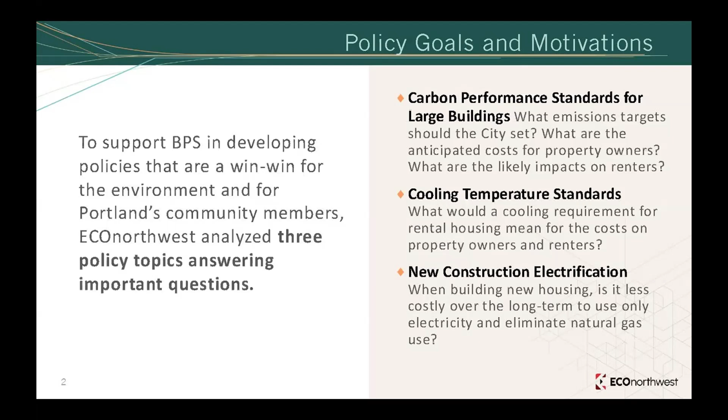And so there's a reason you pay attention to buildings. The city is starting by paying attention to those buildings that are over 20,000 square feet. Buildings make up about 40% of all emissions in the city of Portland. And for those large buildings, there are about a little less than 1,400 large buildings, including large multifamily, large office, large commercial, schools, hotels, hospitals, things of that nature. So it's really kind of the low hanging fruit.

They represent about just under half of all emissions from buildings themselves, but you have to deal with fewer property owners. So you can really have a pretty big impact by targeting some of those properties first. Then you can start thinking about all the single family homes.

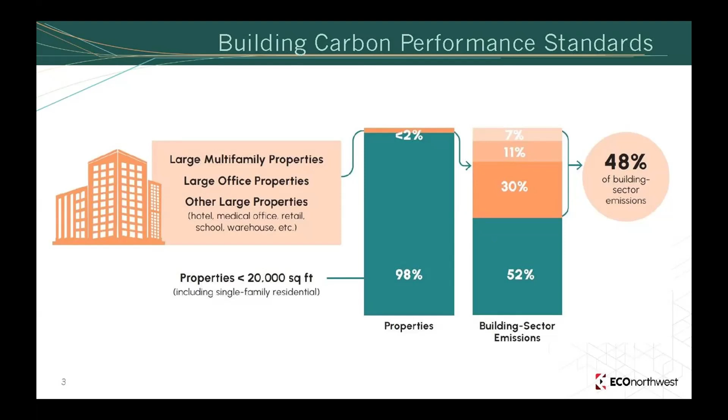And of course, you're not really working in a vacuum. The Oregon legislature passed House Bill 2021, the Oregon Clean Energy Targets. This bill requires Portland General Electric and Pacific Power to reduce their emission levels to about 80% below a baseline by 2030 and 100% by 2040. So there's a lot of decarbonization that's happening within the energy sector.

And so we also wanted to understand just how much more would you have to get from the buildings themselves. For the city of Portland, we looked at not just multifamily, but we were also looking at office buildings. Through this analysis, we determined that you would need to reduce emissions by about 1 kilogram of CO2 equivalent per square foot. There was a measurable that we had to get to really understand what are the potential costs on the other side.

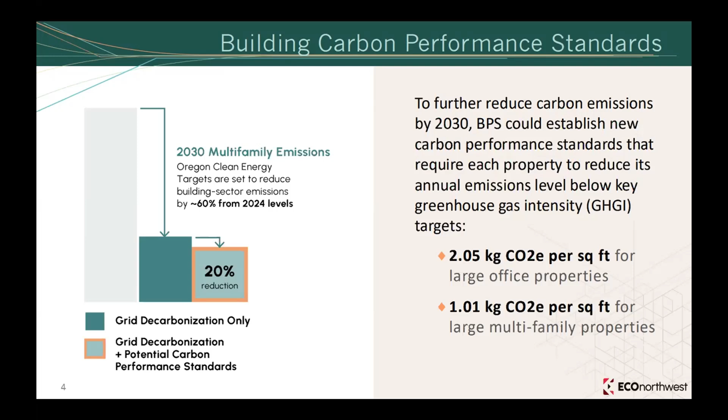And so we looked at, and I wanted to say too that we worked with ZGF architects and PAE electrical and mechanical engineers and DCW cost estimators, really to make sure that we understood what do you have to do with existing, primarily multifamily, I'm going to talk about today, to get the kind of reductions in carbon emissions and to be able to estimate some of those costs.

And as you can probably guess, there is a really wide range of building types and conditions throughout the city of Portland. So we were looking at things like lighting and plug loads, the building envelope improvements, insulation, sealing, things like that, as well as water heating, air heating, cooking, what are all the different things that you could potentially upgrade within a building.

And then actually we wanted to make it as specific to the city of Portland as possible. So we looked at the building stock and when buildings were actually built. And we were able to, looking at all that, really start to categorize different types of buildings, some that would need more intensive investments and some that would need less intensive investments.

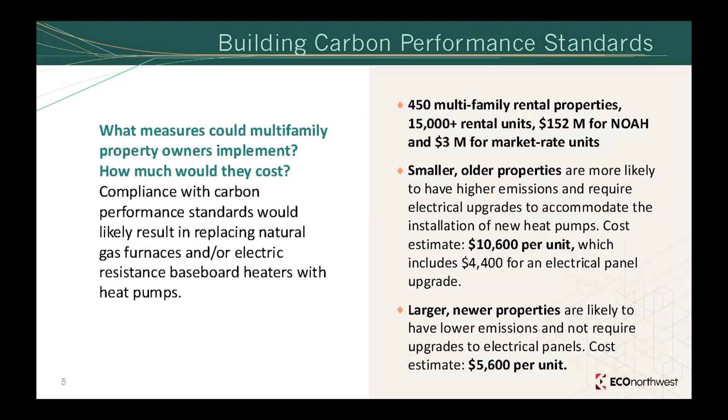Finally, I did want to touch on what this means for rents. Many property owners are going to want to pass on the cost of these investments.

We also looked back at the fall of 2024, and the outlook for incentives, both in the federal Inflation Reduction Act and the Portland Clean Energy Fund and other state incentives, were very positive. It looks a little bit dimmer, I would say, from my seat today.

But we were looking at both what the overall cost would be, what the potential incentives are, what the gap would be that might then need to be filled, and what that starts to look like. One of the things that was clear here is that the rental market is a competitive market.

Landlords are competing for different renters, and depending on how tight that market is, they have more or less leverage. There are a lot of individual players making decisions, and they're not exactly coordinated with each other. So they've got to determine how much they might potentially increase those rents.

If this is a requirement that's across the city, then that amenity might not be seen as an important value that renters are saying, I'm going to pay a little bit more so that I can make sure that I get that heat pump. There's just not as much evidence out there to back that up.

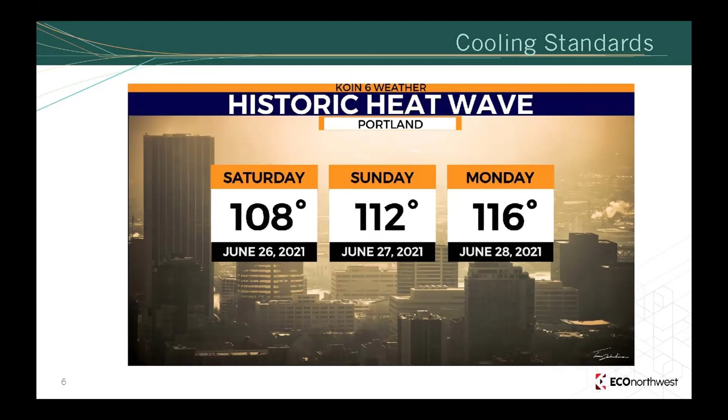That June, I actually celebrated my birthday during the heat wave on that 112-degree day, and it still feels very shocking to me to remember what that felt like.

The thing that, as I've watched other heat waves go across the country, is always a good reminder: when there are heat waves, people die. The people that more often die are older adults living at home, often income restricted, lower income. They die because people aren't checking in with them, or even if they have a way to cool their house, if they do have an air conditioner, it might only reduce the temperature by about 20 degrees. Or they might be really worried about how much it's going to cost to run that air conditioner as much as they should. With these higher heat waves, it also doesn't cool down as much at night.

And so that adds additional stress to people who are living through it. Of course, it's even hotter in so many of the low income areas across the country, up to 5 degrees. And those are not only low income, but often places where people of color are living. So it's always a good reminder to understand why it's important to think about the health implications of our housing policies and climate related policies.

Next slide. So many more cities and communities across the country are thinking about a cooling standard. Most right now have a minimum, like a heating standard, so you can't rent an ice box. Landlords have to provide a furnace or something so you can heat up your unit and be comfortable where you live. Now with some of these extreme heat waves we've seen, they're also asking, what about a ceiling? Can we make sure people can reduce the temperature in their home to something they can survive? You've seen some of these in Arizona, Maryland, and California has some other requirements as well.

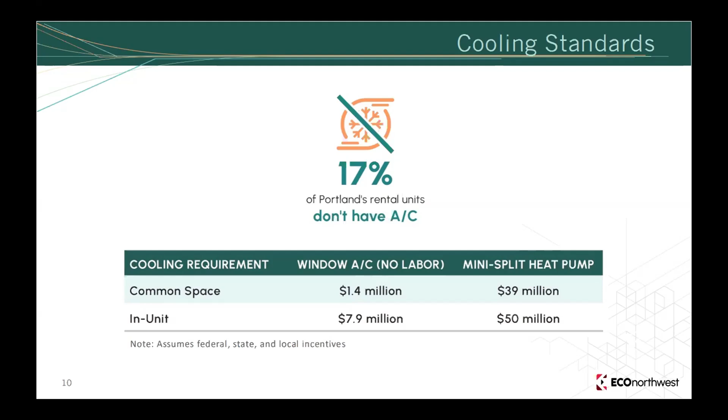The final bit of analysis we did, which was super interesting, is wanting to compare what it costs if you had an all gas, single family or multifamily home, versus a mix, since many of us have a combination like an electric stove but a gas heater. What about a conventional all electric, meaning lower cost electric appliances with baseboard heating, an electric heater or water heater, versus a high efficiency all electric?

We looked at both the installation or upfront construction costs for new construction, and the operating costs over roughly a 15-year period, just to get a better understanding of the total cost.

Looking at single family, we compared electric to gas costs, and gas was more expensive. Conventional electric was cheaper to build, but the high efficiency option basically broke even once you got to that 15-year mark, so you can see that return on investment.

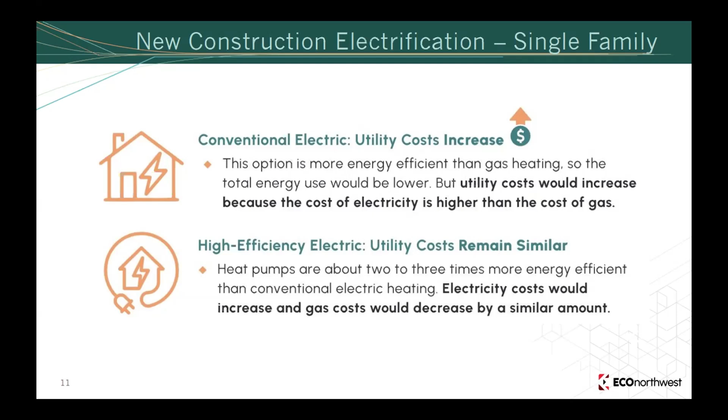I want to put a caveat that it's pretty rare to have an all gas multifamily apartment building or property, because it's so much more expensive, so you almost never see it. That's one reason we included mixed heat - property developers are often looking for the least cost while still having the amenities people care about, and you see a lot of air conditioned units especially in newer construction.

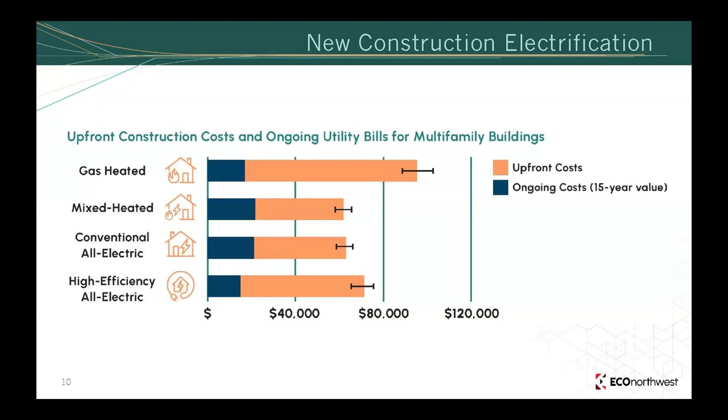You don't have to take my word for it - next slide. If you want to read any of these reports, you can download them from the City of Portland's website, where there's more information about building decarbonization efforts. Thank you.

Hi everybody, my name's Rita Haberman. I'm a built environment specialist with Oregon DEQ, and I'm going to share information about embodied carbon: what is it, why should we care about it, and what are we doing about it, what can we do about it?

Next slide please. Before I dive in, you might be wondering why DEQ is working in the built environment. DEQ regulates tailpipe emissions and polluters and promotes recycling - yeah, DEQ does that.

More than 10 years ago, DEQ embarked upon a strategic plan, and what differentiated that effort from prior ones was that DEQ really took a life cycle perspective on the materials we use, everything from building products to appliances and furniture. What we learned is that the lion's share of impacts of the materials and products we use are upstream in the manufacturing process, not at end of life disposal, where DEQ's program was called Solid Waste and Recycling.

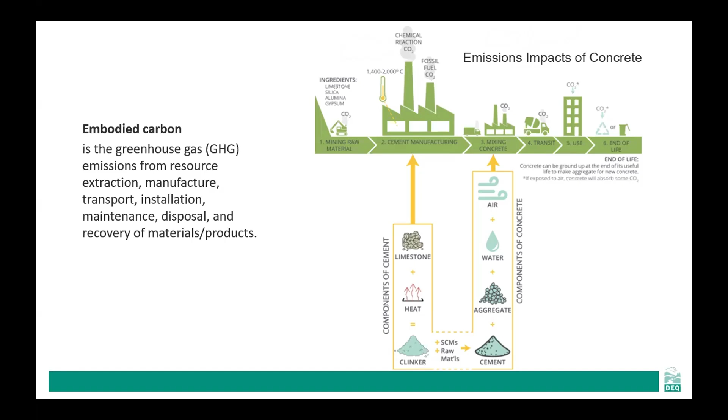It's not just concrete and cement that have the majority of their impacts upstream in production. In general, for all building products—with some exceptions—roughly 90% of their impacts are upstream in manufacturing and production.

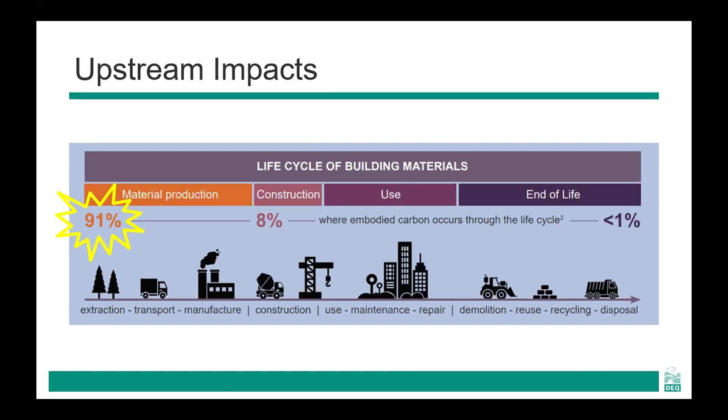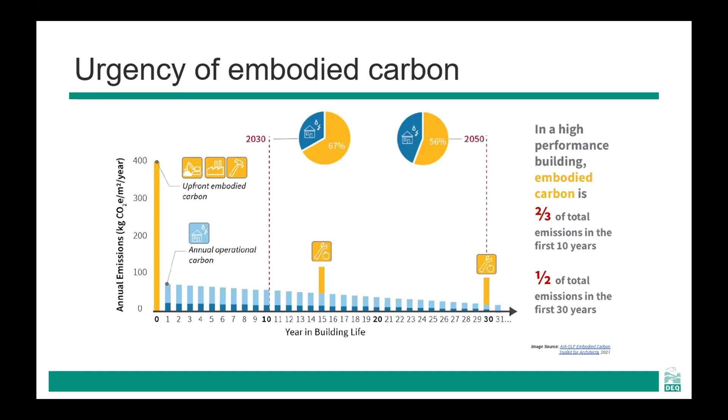As Becky was noting, our grid is getting greener, so our operational load will go down regardless of what we do to a specific building. My point is that as our buildings get more energy efficient, their operational carbon impact is decreasing. The remaining piece of the puzzle we still need to address is the embodied carbon impacts of our buildings associated with materials.

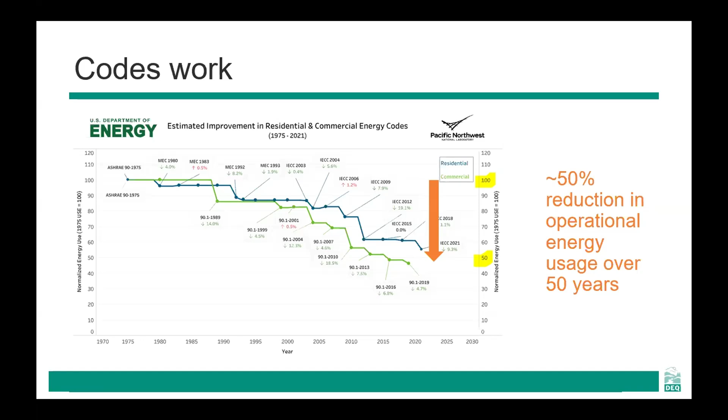So my point here is, when we focus on issues, we can do amazing work. If we don't focus on them, we're in trouble. One of the things we're working on at DEQ is supporting the Building Codes Division and other players to explore integrating embodied carbon limits within our building code, just like we have energy efficiency within our building code. Codes work.

So how do we measure, how do we quantify embodied carbon? This can get really complex, but in its simplest terms, it's done through a rigorous accounting methodology based on ISO standards—thinking about what goes into it and what goes out. The results, for building products and other products, get compiled into a report called an environmental product declaration, or EPD.

Think of an EPD, environmental product declaration—it's really analogous to a nutritional label. With an EPD, we can compare the embodied carbon or global warming potential of different sheetrock products, just like we can compare the caloric characteristics of different ice cream. So it's really a label to help inform our procurement.

The embodied carbon emissions of building materials used throughout the state of Oregon account for more than 14% of our consumption-based greenhouse gas impacts—that's a pretty big slice of the pie. If we add the operational carbon impacts of our buildings, which ironically is also around 14% now, our buildings account for more than a quarter of our greenhouse gas impacts throughout the state of Oregon. That's a big chunk of the pie, and an area to focus on.

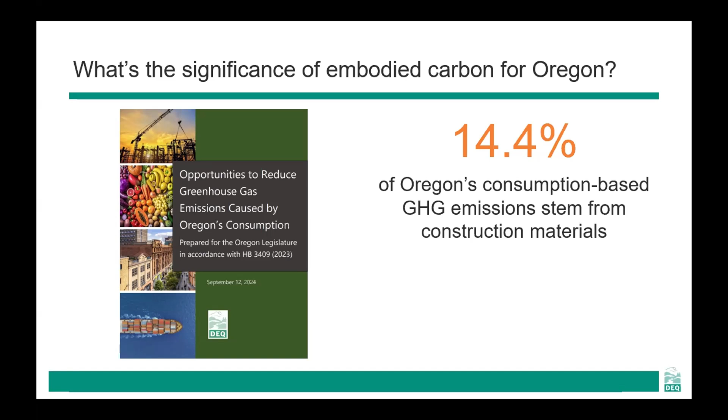So what do we do about it? Well, one thing we're doing is we need to assess, quantify, and disclose the impacts of our building products. We need to help and nudge manufacturers to do life cycle assessments of their products and disclose those carbon impacts.

Last summer, DEQ partnered with our sister agency in Washington State Department of Commerce, as well as International Code Council, and we pursued funding from US EPA specifically to help manufacturers of building products serving our region do that life cycle assessment and produce EPDs. That's kind of step one.

Unfortunately, this grant did not get through contract execution before January 20th this year, so this program is in limbo. We haven't formally heard yet whether it's stalled out indefinitely and dead. We're still holding out a little bit of hope because a lot of manufacturers were also awarded these grant funds to do this work. Anyway, it's an important tool and important strategy.

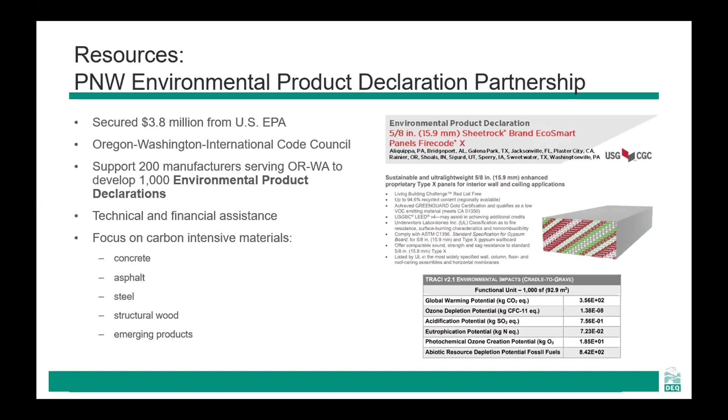Next slide. Another thing we're doing is we pursued many buckets of EPA funding while the getting was good. Last summer, the state of Oregon secured just shy of $200 million from EPA in a program called Climate Pollution Reduction Grants. This was a joint effort with the governor's office, Oregon Department of Energy, and other partners to implement 12 priority strategic climate actions, including some related to housing.

Approximately 25 million of the 200 million is specifically for housing. Next slide, please. More specifically, that 25 million is going to be used to incentivize two different low carbon housing strategies.

The first one is adaptive reuse of underutilized existing buildings, converting those to housing. The potential for this is significant. It's no surprise to a lot of us who run around Portland. Approximately 1/3 of Portland downtown office buildings, I know the number fluctuates, but let's just say 1/4 to 1/3 are vacant. But it's not just the big Portland metropolitan area. There's a lot of opportunity in small town Oregon as well.

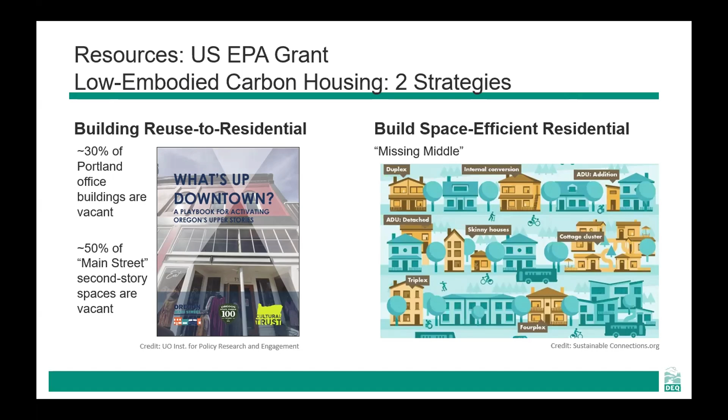We're focused on these two strategies, building reuse and space-efficient new housing, because they are by nature low carbon. Both of these strategies require less materials to build. Smaller spaces take less energy to heat, cool, ventilate, and light. Smaller spaces also provide less space for all our stuff.

Our stuff is a big part of our climate problem. We have an overconsumption problem. Do we all need two vehicles, a lawnmower, an extension ladder? We don't all need that stuff, and three couches for three rooms we don't even use. So that's part of the puzzle, but we'll save that one for another time.

And another thing—this is something this group knows very well—it's not just about building housing, it's really important about where we build it, right? Both of these strategies are conducive to development in already developed areas, infill, which gives us the opportunity to use existing infrastructure and get around that barrier.

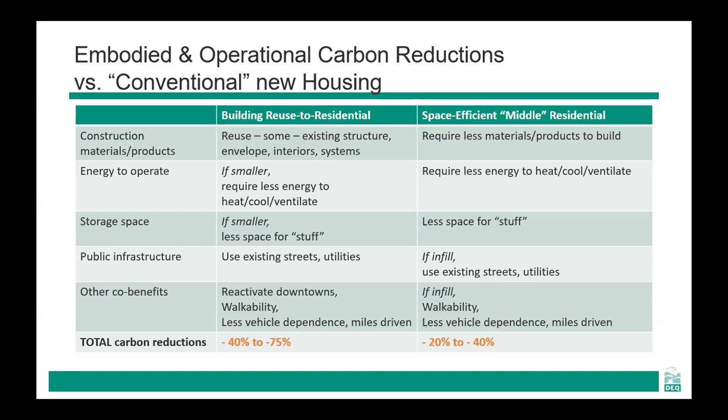Personally, I think one of the most interesting aspects of this are the co-benefits, which is kind of a sterile term for some of the most important, meaningful stuff. We have an opportunity to revitalize and reactivate some of our downtown areas, and an opportunity to provide more walkable lifestyles. Someone else mentioned this earlier, but we're so dependent on our vehicles—if we're really focused on that infill, we can reduce a lot of those impacts. They're noteworthy.

So the way we're going to get these $25 million out the door is we're partnering with 9 local governments throughout the state, including the city of Bend and Rachel and her team. Local governments are playing the role of boots on the ground, if you will. They're helping us with the outreach, getting the word out, and they're also going to be helping us with on-site verification.

To help us verify the projects. And DEQ is playing more of a higher level coordination role. We're putting together tools and resources, and we will be interfacing with US EPA. When it's all said and done, over the course of the 4-year implementation period, we're anticipating we'll have 900 new housing units that'll be workforce and affordable housing.

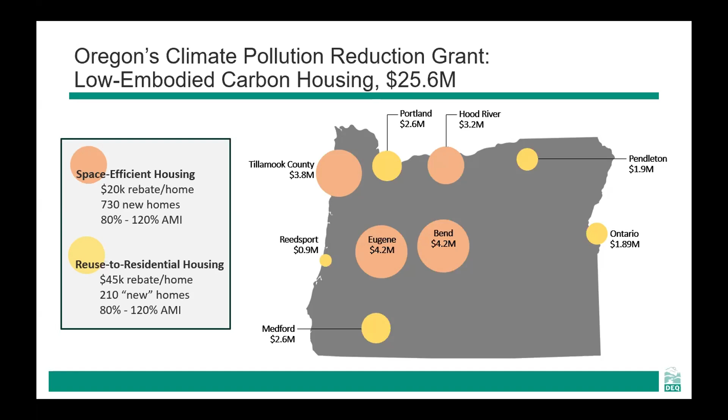And I should mention that these are EPA funds coming from the Inflation Reduction Act, and it's been a really, really interesting last several weeks with the spigot going on and off with regard to funding. At the moment, it's on, so we are forging ahead as quickly as we can, but it's been an extremely tumultuous last several weeks here.

Next slide. In addition to building reuse and building smaller, another opportunity related to reducing the impact of housing is the informed selection of the materials that we use to select more lower embodied carbon materials. Some really cool research has come out of Canada, Rocky Mountain Institute, and some partners. The takeaway here is there's a relatively limited list of product categories that account for the lion's share of the impact. So we don't need to be looking at nails and screws and door hardware and too many details. We can focus on a handful of product categories, like concrete, insulation, exterior cladding, sheetrock, and flooring.

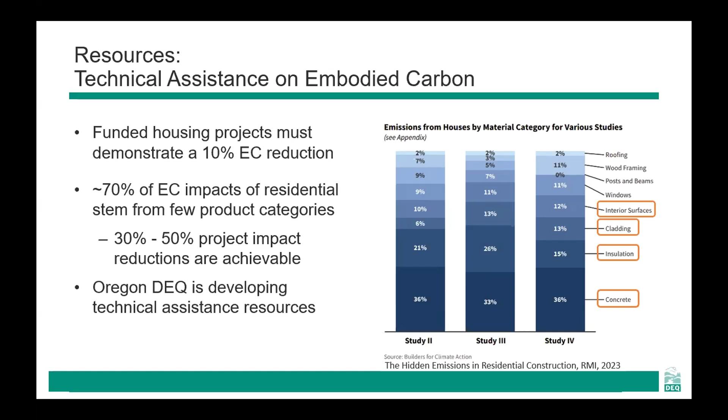If we just focused on those material categories and we used environmental product declarations associated with those products, we can reduce the impact significantly, 30%, 50%, just by making more informed choices.

So if embodied carbon is of any interest to you, I strongly encourage you to check out some resources. The Carbon Leadership Forum, CLF, top notch, just incredible research. They're serving all of us. They put together some incredible educational resources that we at DEQ use all the time. Architecture 2030 is another really helpful resource. And then DEQ is going to be putting together technical assistance resources to help housing projects that are part of the grant program that I mentioned.

But one of the efforts that I just want to call out is Oregon Building Codes Division last year. They did a study of the potential of including embodied carbon limits within building code, and they completed that study and analysis, which DEQ supported them in that effort. They issued that in December, right before the end of the year. We see that as very, very promising, and I call it out because it might be coming down the pike, and it might be something that you might be interested in checking out.

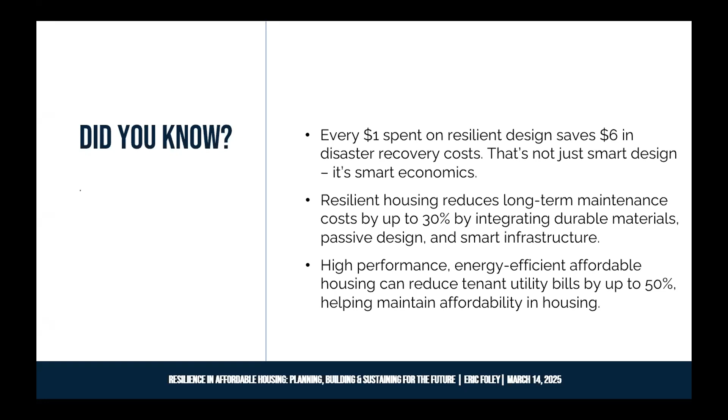Housing has, in terms of long-term maintenance, up to 30% reductions through durable materials, embodied carbon, passive designs, and smart infrastructure. These are all really important impacts. There's also reduction of utility bills - when you get into a house, it's not just the cost of rent, but also the utilities you spend to maintain and live in those spaces. Sometimes when utility costs go too high, you may be forced out of housing, so it's really important to keep those costs low.

So here's going to span out a little bit in terms of the financial implications. Two years ago, when I gave a presentation on resiliency, the number in 2022 from Munich RE, a global reinsurer and one of the largest outfits that does so, was $270 billion. In 2024, that number had grown to $320 billion of financial impacts on a worldwide basis.

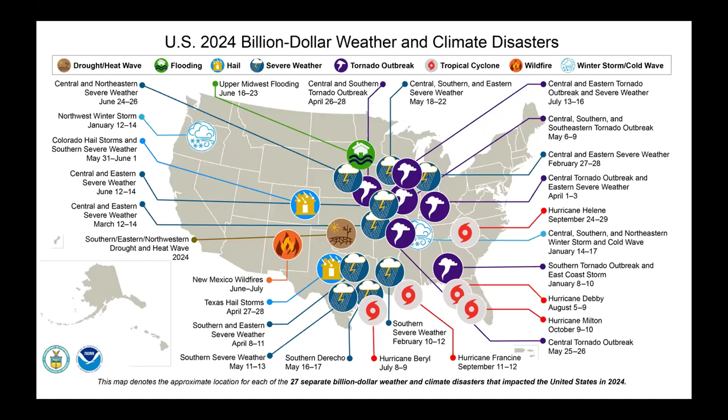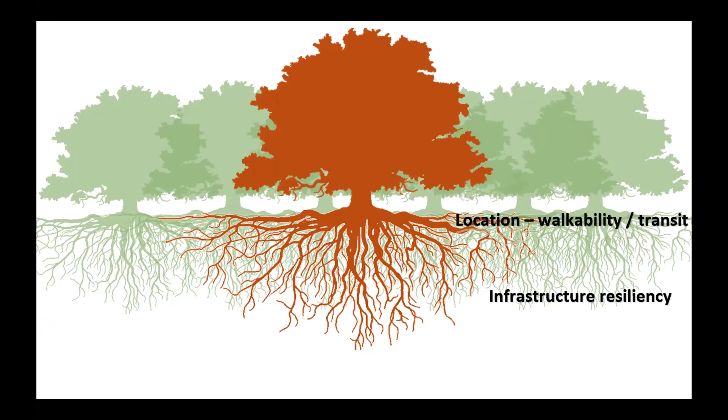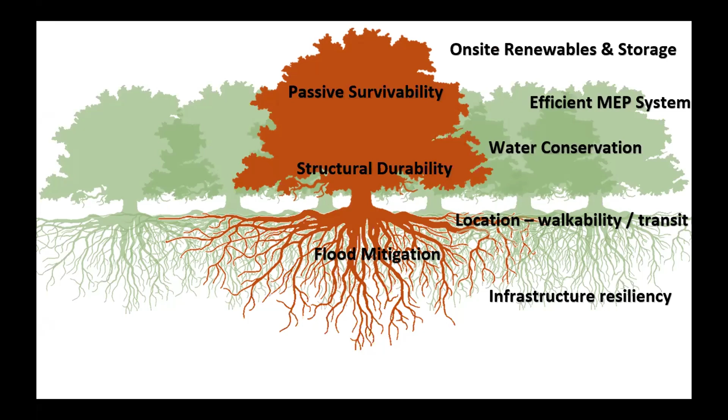So we have to think about it as an ecosystem — you are not just relying on yourselves, but you're relying on those neighbors around you, especially when disaster is happening. So location, transportation, infrastructure — we're looking at passive survivability, structural durability, flood mitigations. We're looking at on-site renewables and storage, and then we keep moving through here. There's a lot of clicks. Natural lights and also operations affordability.

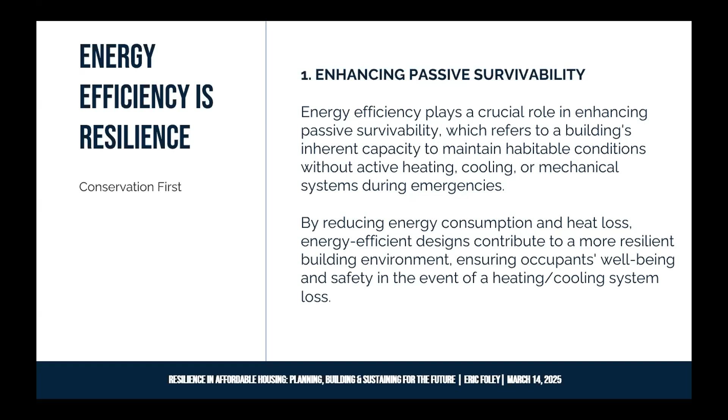When I talk about sustainability and resiliency factors, I talk about passive survivability first. We want to think about the infrastructure, the building itself, and how it's able to survive through means within itself, not through mechanical means or other utilities, because when a natural disaster happens, most of that infrastructure is probably going to get lost. So you have to think about the building itself, how you can survive in that space, and how you can help one another in your community.

Then you move on to the next phase, which is lowering that energy through efficient systems, like HVAC and domestic hot water. We know that water is about 30% of the energy cost of a building, in terms of that overall footprint.

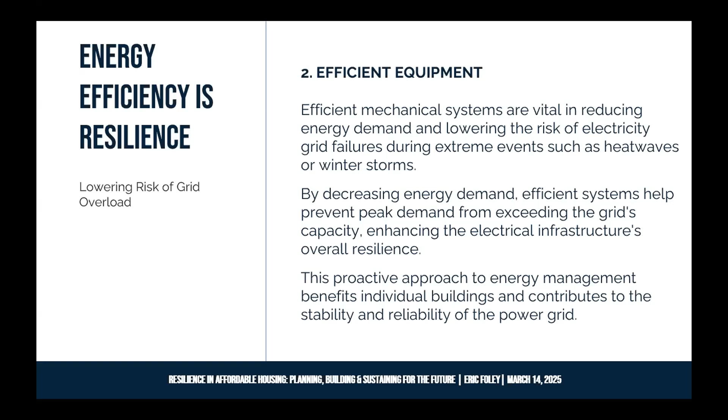We think about air quality. A lot of us probably saw and felt the forest fires seemingly growing in our markets — this is on a nationwide basis. Air quality really matters in terms of the solutions we're thinking about, like filtration and how we're keeping those spaces clean. There are some cool study details, and I've got a pamphlet available if anyone has interest, and we can provide it later. There's a thing where you use MERV filters and a box fan together, which provides filtration of your space on a temporary basis if you don't already have the infrastructure in your building.

Now we move on to on-site storage, so renewables and battery operations. That's for the microgrids and the peak loads and these other types of things where we're shifting that energy load and how we're able to work through that.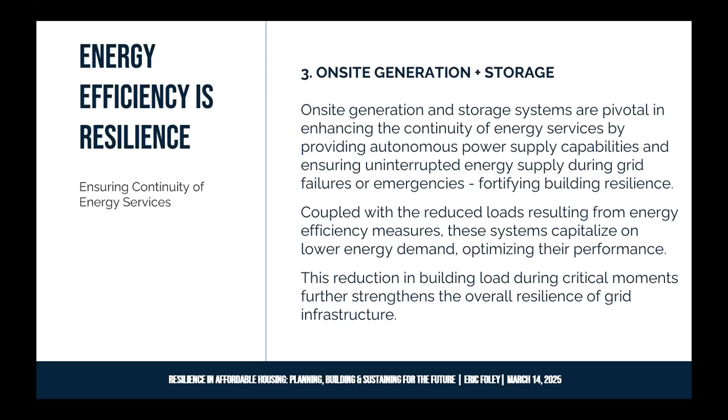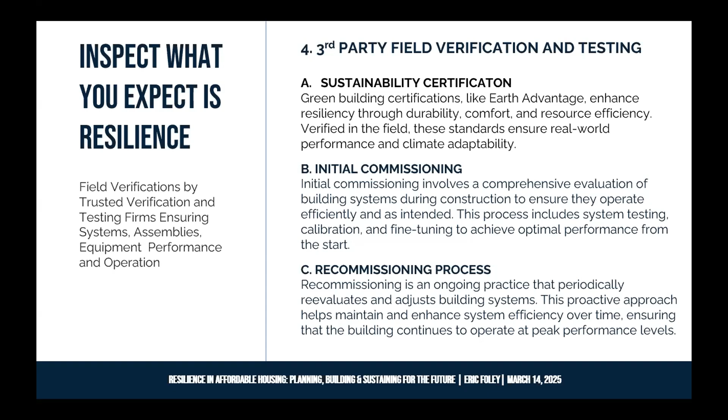For the business that I do, we're talking about sustainability initiatives — third-party certifications, where we're a guide for people working through that. I work through projects like LEED for Homes, Earth Advantage, Enterprise Green Communities, Energy Star, and Passive House. These certifications exist on a local, regional, and national basis, and they provide access to debt, equity, capital, tax credits, and incentives that help people make improvements on their properties and move them towards a better solution. We also need to think about commissioning and recommissioning of buildings, because if the equipment's not functioning properly, it won't be able to function as expected for that building.

You may have great building materials, you may have great equipment, but if it doesn't work right, then are you actually providing an equitable solution for the residents? And the last piece here is planning and training.

Having a plan that allows you to get through those systems, training up on different things. What do you do? PBEM and other agencies have solutions like BEECN and NET for training you on what you can do and how you can survive before FEMA can come in and help with survivability. These are all really important things.

We've got a lot of different types of natural disasters. Obviously we're on the subduction zone, so we're eventually going to have the big earthquake here. We've got forest fires, we've got heat waves. There's just a lot of things we have to take into consideration.

So now giving that example, I want to talk about several of the affordable housing organizations. There were too many to choose from. I know I've seen a couple of affordable housing developers here, and it was hard to choose because everybody's doing really great work. So I just picked a couple to share a little story about.

The first one here, they do all of those things in terms of the shell, the efficiencies of equipment, having a plan, working through sustainability, thinking about those things. But this particular developer, CCC, did a concept I call hub and spoke, or node, or web.

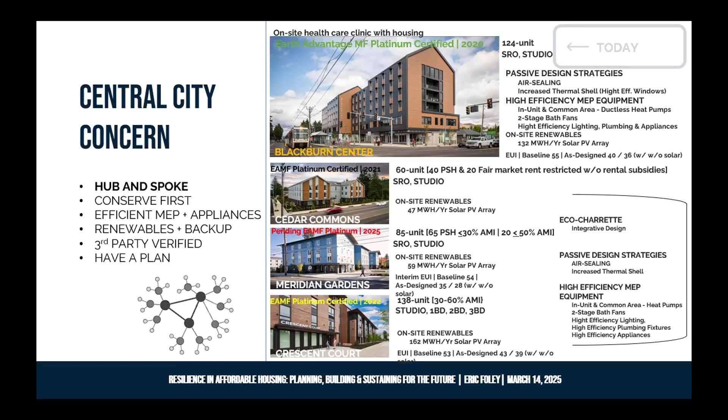The next developer is Hacienda in the Cully neighborhood, Las Adelitas, taking back that space, and it's really a vibrant community now. They got a lot of input from the residents before they went through that process to make certain that space was going to be viable for them.

The facility for headquarters for Hacienda is next door, so once again there's this connection to one another, but they're also looking at future-proofing their buildings. They did an initiative called Mi Casa, with 6 properties, about 1,000 units, doing retrofit upgrades to those properties.

To once again provide cooling and other types of electrification, other things that will help that building and those communities, as well as some upgrades they're doing in terms of all-electric and some really cool initiatives to address not just today, but also tomorrow.

We're thinking about the long-term effects. These buildings are intended to live for generations. They're not meant to be derelict in about a 10 to 20 year period. So the designs and initiatives we're all doing together are thinking about that longer horizon.

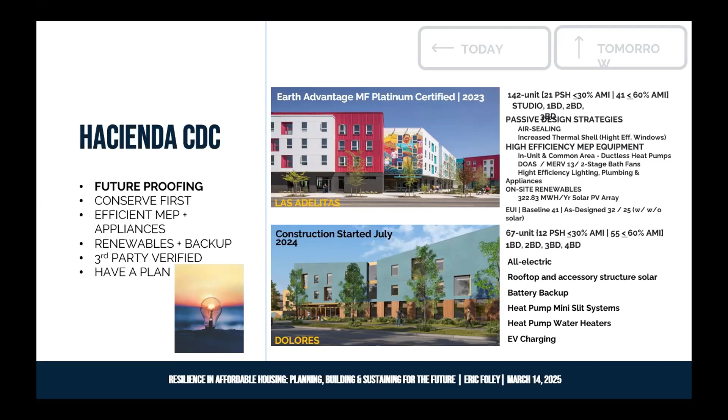And the last project here is for BIPOC communities, senior housing. It's in the North Portland area, currently just finishing up design. It's going into development for M. Carter Commons. The concept here is what we call a nest approach.

So if you don't have the funds to create a solution for the entire building, then you center the funds on maybe the community space, and really amp up some of the systems in that, so the residents have a place to go to provide a bit better shelter during those inclement weather patterns, and then be able to rely on that.

This one's also going for Earth Advantage certification along with some federal tax funds. We'll see if those hold. As far as we understand, they are right now going through the 45L tax credits.

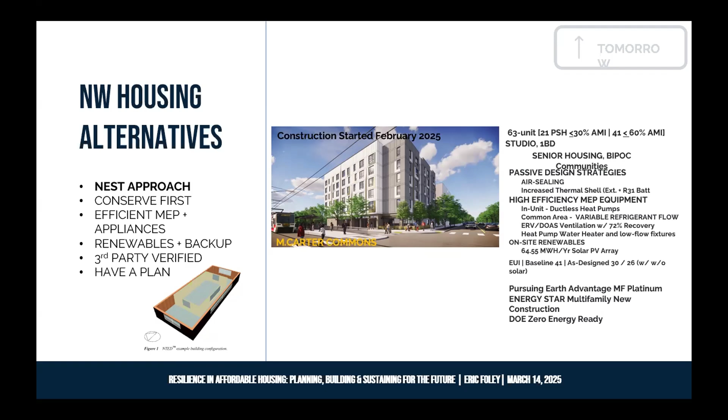That's the Energy Star and the DOE Zero Energy Ready programs. So these are also things that are able to layer on that capital stack and allow those projects to proceed forward with all of these great initiatives.

So my call to action to you all is that we need to not just think about resiliency as a feature, but we have to really expand our ideas about the foundation of that for affordability, both on the short and long term, and also think about operations and investment in housing that remains safe, livable, and cost-effective in a changing world.

I've got a lot of other resources, a lot of content that could cover more than a week or two weeks or months worth of time. So if there's interest about what people are doing in terms of best practices or some of the future-proofing for phase changing and stuff of that nature, come see me. I'd be happy to have a conversation with you all. And thank you very much for your attention.